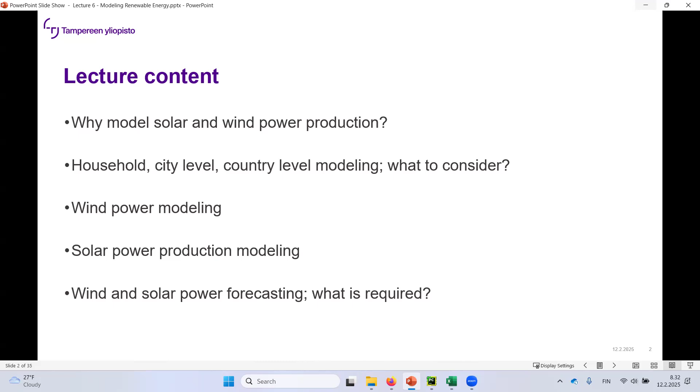Yeah, should be on. So the lecture will start on pondering again why the wind and solar power production are rather important. We'll briefly go through what are the things to consider when you're doing household, city level or country level modeling. Mostly this is about gathering data. You have to be able to gather solar irradiation data and wind speed and directional data. And then some techniques about wind power modeling and solar power production modeling. So what is required when you are doing these?

So again, the same picture that I've shown you before about the energy systems. There's the supply, storage, conversion, consumption, and the transmission. So this is part of the primary energy palette that you have the solar and wind, and at the moment on a larger scale, in a global scale, they are somewhat insignificant in terms of absolute amounts. But for example, in Finland and some other regions, they have a huge impact on the energy prices, for example.

So the conversion, it's already happening in the solar and wind power plants. So in that sense, it doesn't have this traditional conversion part. So straight to the electricity grid or to the consumption.

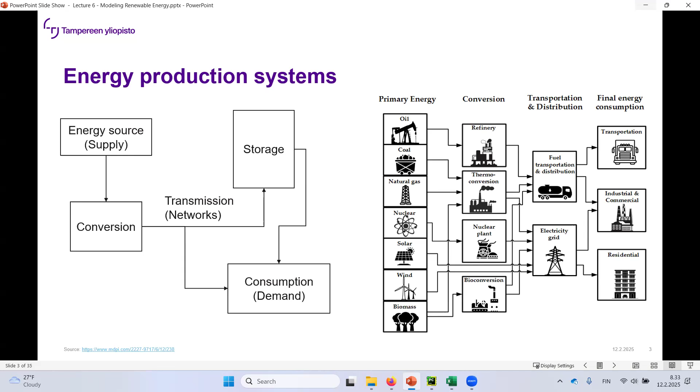And by the way, related to solar power, I think it was Albert Einstein that got the Nobel Prize on explaining this principle related to the solar power. So valokemiallinen ilmiö. I'm not sure what that was in English, but either way. So it's been known over 100 years. I think it was something like 1904 that he got the prize.

But yeah, I digress. So why do you want to model the solar and wind power production? It's essential for energy system planning nowadays. Grid stability, market optimization. You have to be able to know beforehand what's happening. So it's related to the site selection. So what site, for example, provides the best wind conditions, solar conditions, investment decisions, and predicting the renewable energy output related to this grid stability.

And this variability related to these production systems, it's in the center of this modeling. So you want to be able to know how fast the system power changes. As we talked about last time, it was about the storage optimization also. So you have to be able to know the production to be able to optimize the storage systems. So to enhance economic feasibility, and of course for policymakers, how fast can we implement these kinds of sources to go towards the net zero system?

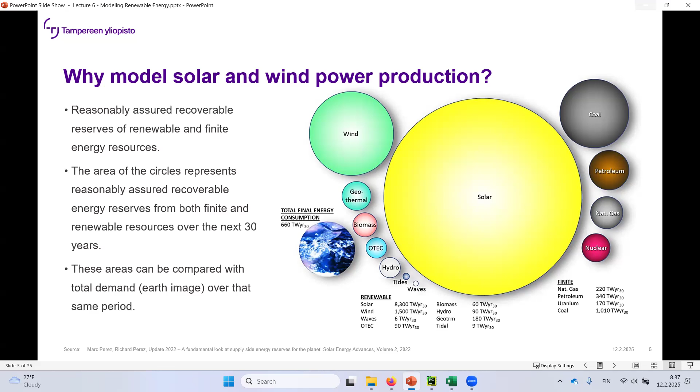But either way, if we can jumpstart the hydrogen economy and add the consumption of these cheaper energy sources, then it's going to do good for this wind and solar power development.

And I think the capacity in Finland at the moment was somewhere close to 9,000 megawatts. So at least it's over 8,500. And like 10 years back, nobody would have expected that. 10 years back, it was somewhere close to 1,500 or something like that. So it's almost 10 times, well, 5 times bigger at least.

So by the way, now you have the Moodle assignment 2, and there was the question that you have to modify. It was considering Finland as an island related to electricity production, so there are no connections to other countries. The assignment was that you have to add some capacity in there. And of course, you want to add solar and wind, but as you can see, in some cases that's not going to be enough. So that makes you wonder and ponder what is going to be the flexible, dispatchable power source for it.

It has been biomass, but nowadays they are using even nuclear power to down-regulate, especially when you have too much wind and solar in the system. By the way, don't increase water power too much in Finland. We don't have the capability or the rivers anymore for that.

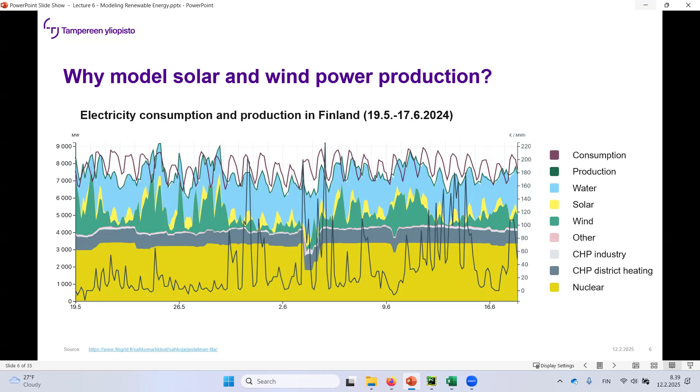So what to take into account when you're doing this household level modeling related to solar and energy? The focus is on individual solar panels and really small wind turbines. So you have to have a high spatial resolution. And usually when you're gathering solar irradiation data, you have to get as close to your household as possible, but there aren't too many measurement stations in Finland. Well, there are many, but they are most likely not close to your house. So you have to take some kind of an average, for example, from different sources if you want to make really exact modeling.

And it's usually a deterministic approach, based on hourly or even sub-hourly weather data and historical production from the installed system. So that's a good thing if, for example, your neighbor has a solar panel, then you can ask, hey, can I see your production data? If that's possible, then you can backtrack the irradiance data. And that's really essential when you're trying to determine the system profitability.

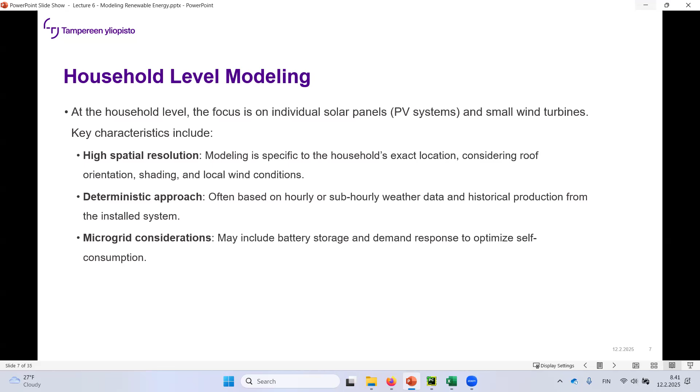So you have to have accurate data on consumption. You have to have accurate data on the weather conditions, whether it's the wind or the solar irradiation or whatever sources. The Copernicus data is the first you're going to go to, and there one grid cell is almost 30 kilometers, so it's averaged based on that. And then you're going to go to the Finnish Meteorological Institute site and see if there's any measurement data with higher resolution.

Limited aggregation effects. So variability is high, as production depends entirely on local conditions, and you have really small production systems. There are different kinds of commercial software that you can use to model these, and a lot of internet calculators to calculate the profitability of solar panels. But I would say that it's always better, if your neighbor has the panels, to get the irradiation data directly from there.

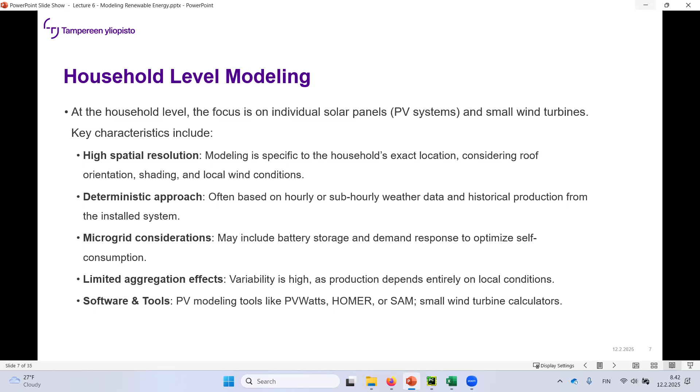So city level modeling involves multiple households and buildings. So there's the effect of aggregation: spatial aggregation of multiple photovoltaics and wind installations. In this case, for example, the Copernicus data sets come into play. So you can take the averaged wind patterns or irradiation data. And then you have to take into account grid-related issues. So how much electricity can you transfer in the network?

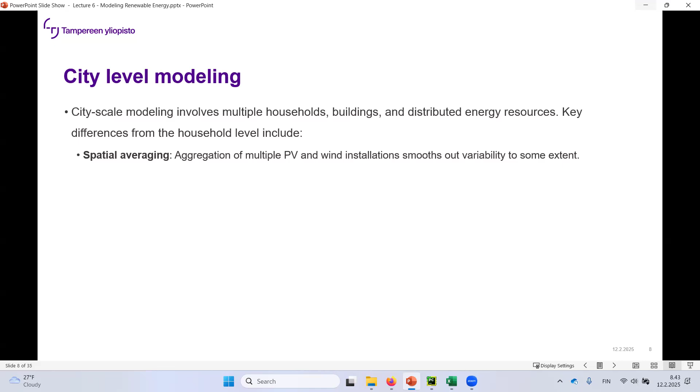That's actually one issue related to one of the master's theses I'm supervising: a certain city wants to inspect, if there's going to be a lot more wind power in their area, does it fit into the transmission grid? So higher grid interactions. You have to be able to see how the production interacts with the grid, and if there are some bottlenecks in the transfer.

Weather variability across locations. So you have to apply more complex weather models to make the predictions, but in terms of weather data aggregation, if you aggregate the weather data, it seems that it smooths out the profiles. So if you have gusts of wind here and there, it usually means that in another place it's more stable. So they are averaging out the really sudden spikes in production that are evident at the household level.

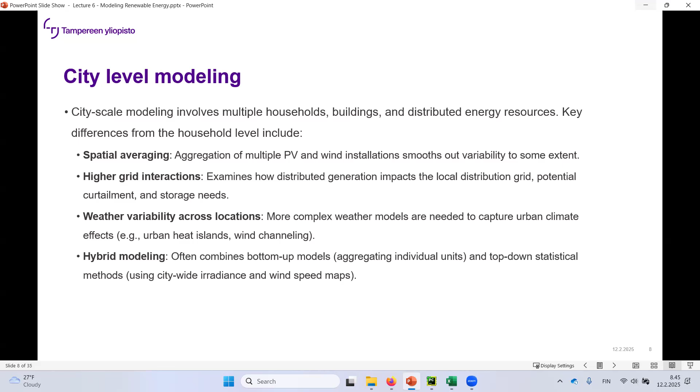So then you can start to combine these bottom-up models and top-down statistical methods. And then you have to have these GIS-based tools, so you have to have some kind of location data in there. And country-level modeling, so that's what you are doing with SpineOpt, and we are doing it at a really rudimentary, crude level.

And what you're using in there is previous year's data. So what is the capacity factor? The overall capacity factor of a country comes into play here. Since Finland is one price area, it's easy to use the previous data from Finland, the whole Finland's production. If it were split into multiple price areas, price zones, it would be a bit more difficult. But in this sense, Finland is a rather easy country to model since it's only one price area.

So for large resource mappings, you can use satellite and meteorological data for forecasting, grid integration studies, balancing variability with demand, transmission constraints, storage options. So there seems to be some kind of a bottleneck forming in the north-south direction in Finland related to the grid that Fingrid is already aware of, and it's taking precautions related to that.

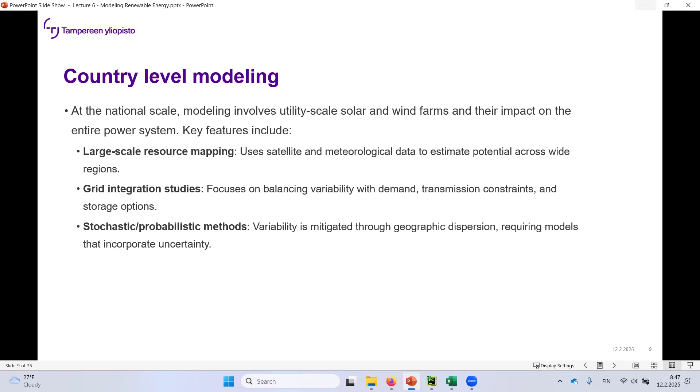So they are in net demand, and Pohjanmaa, since there's a lot of excess wind power production, would have to be able to transfer the electricity from there to Helsinki. So that's forming some sort of a bottleneck. But they are still not talking about making multiple price zones in Finland. So stochastic and probability models, that's what you're using in here. And the temporal resolution, as in your case in the SpineOpt exercise, is going to be hourly, but you can range to multi-year simulation as well.

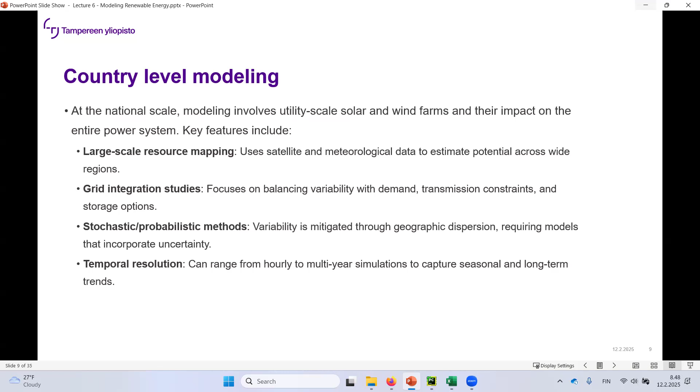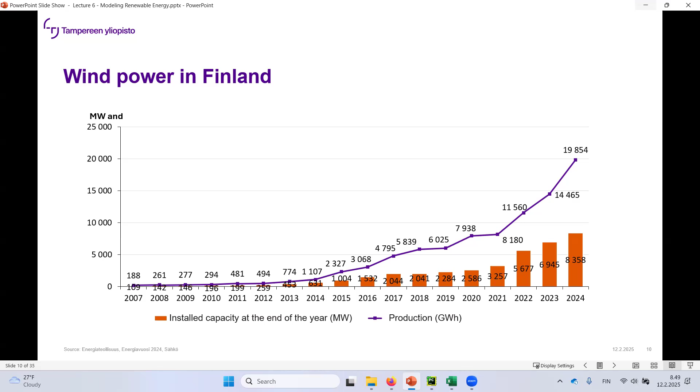And then there's the market and policy considerations. So at the end of year 2024, it was 8,358, so I guess around 8,500. You can see there's a really steep trend upwards, but it is showing signs of saturation. So there has to be some kind of consumption for this in Finland that's going to arise. Most likely it's going to be related to hydrogen production, for example.

So there is variability in wind production. I think this was from Fingrid and Renewables Ninja, or probably only Renewables Ninja, because they offer more accurate resolution than just the entire country. So you can select a certain point in Finland, or you can select the entire country, and there you can see the capacity factor, so the power production index relative to the maximum, how much is being produced.

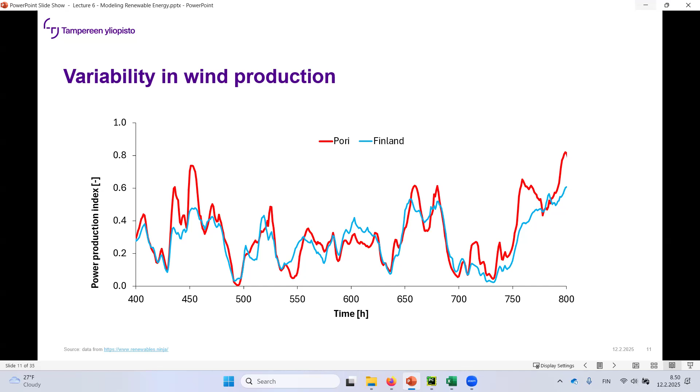So you can see that in the Pori region, there are a bit steeper changes, but there's not too much difference here. Since Finland has concentrated almost all of its wind power production on the western coastline, the entire country is rather close to what's happening in, for example, Pori. So the load duration curves are almost equal.

But then if you go to Germany, this is from Tom Brown's course on energy system modeling. I've linked the lecture slides in here, and you can find the course completely online. So that's a really excellent course.

So you want to check that out as well. So there's Berlin wind, Germany onshore wind, and Europe all wind. So you can start to see the effect of the aggregation in here. So the best thing, of course, would be that the renewables would kind of follow the load.

But in essence, this is a good thing, that the wider the area, the more flat your load duration curve is going to be, because it means that it's going to be steady production. So you can see in Europe, there are no 0 hours. And in Finland, I'm guessing there are a few that have just a really small amount of wind power in the electric network. But either way, we are also not facing too many 0 hours related to this wind production.

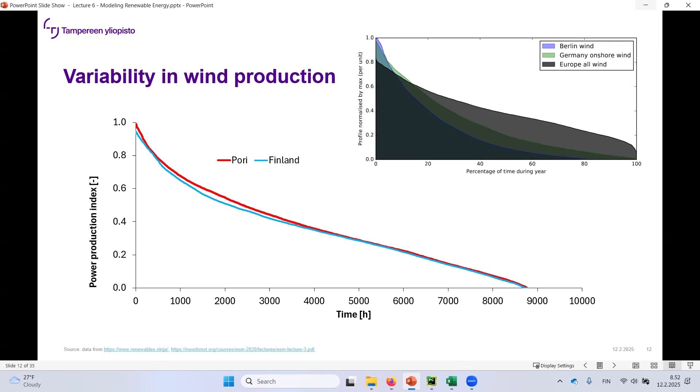About the Copernicus wind data. You can go and download it freely. You just have to register on the site. So there's a lot of wind data available for most regions. I don't know what's the coverage, I didn't check it, but for example, for Finland it covers pretty much all of Finland, including land and ocean areas.

High temporal resolution, so they provide hourly, 3-hourly, daily, or monthly time series. So this hourly is really nice. Of course, the Finnish Meteorological Institute provides, I'm guessing, maybe 10 minutes, so it's sub-hourly production as well.

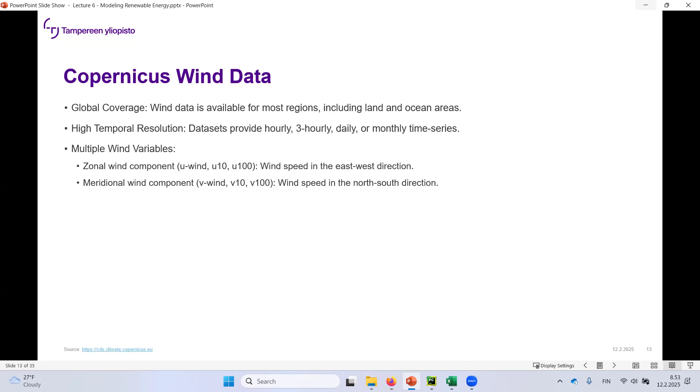There are multiple variables in this Copernicus data. So there's, for example, this wind component. It's like the north-south, east-west component. So when you have both of those components, then you can also calculate the direction of the wind. So that's a really nice system. So you can get the total wind speed from here.

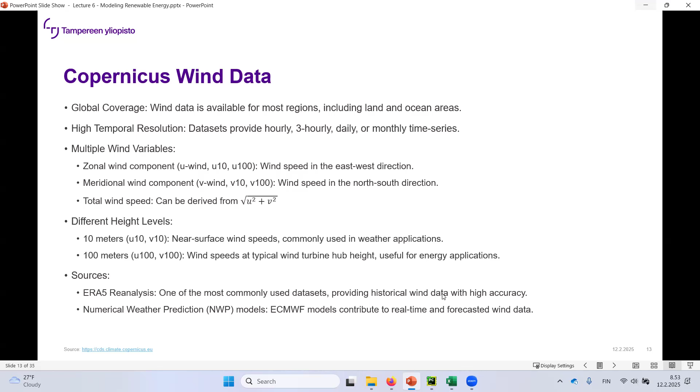Different height levels, 10 meters, 100 meters, for example, are usually provided. And that is something that you can utilize with typical wind turbines, because that's pretty close to the height of the nacelle. And this ERA5 is something that you want to look for. It is in a somewhat tricky format, but now in the era of AI, I wouldn't say that's a problem.

So let's go here. Okay, let's see. Copernicus ERA5, so hourly data. And from here you can make downloads, and you can see that for wind, you could, for example, take the 100-meter U component and V component. So you need both of those to get the direction and the mean wind speed.

And for radiation, you can see there's surface thermal radiation downwards. That would be something that you want. And you can select from all the years, so there's a lot of data. You can select, for example, which month, so this would be January. And then you can select all the dates and all the times.

And then in here, if I recall right, Finland would have been 70, 59 in here, 32, and this was probably 19, according to AI at least. So then I would use this one, but I would have to log in here, some login problems now. But then you submit the request, this API request, and it takes maybe 10 minutes, and then you can download it.

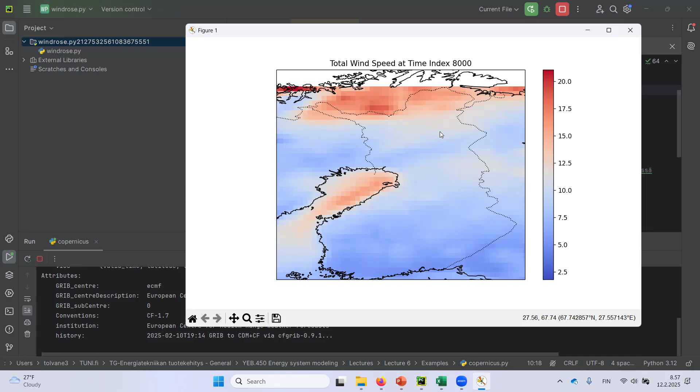So that's from Finland, and you can see that the wind speed, for example, in the northern areas at that point was rather high, and in the sea areas as well. So there's a lot of data freely available. You just have to know how to utilize it.

And what I did manage to do with the data, I asked AI to make me a program that extracted, because the grids in the Tampere region, I think it was 28 kilometers times 13 kilometers. And I'm thinking that the further north you go, the narrower the grid gets. So that's why it doesn't have a 28 times 28 resolution.

So what I did is I took the wind data from all of these points. There were 25 points, so I have 25 different wind speed time series. And then you can calculate the wind production; this is from 100 meters, so it means that the nacelle is at 100 meters. And then I gave all the wind power plants a diameter of 150 meters and an efficiency of 0.4. And that's the basic equation to calculate the power.

So there's the minimum and maximum powers in this area. If everything was concentrated into one point, that would mean that there would be really large variations. Wind speed varies quite a lot, in the sense that in this area you can have like 2 meters per second lower wind speed in one region than the other, and that means there's going to be a lot of power variation. But if you aggregate it, it makes the power variation much lower.

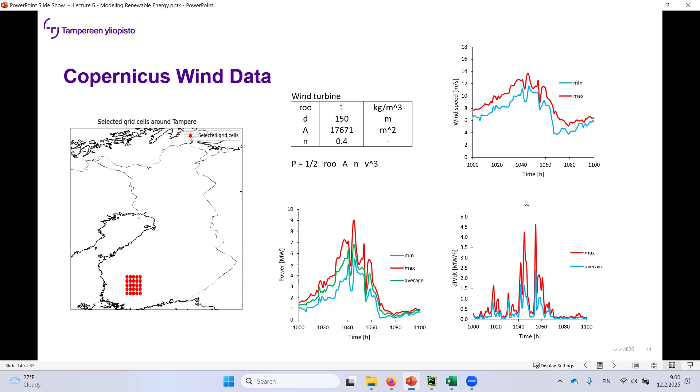So that's the derivative of the power in megawatts per hour. If I average out the data from this power production, there's only 1.5 megawatts per hour changes. But if I don't average it out, there is a lot more variability. And that's a good thing for the system, because it averages out the production. So whenever you want to make accurate wind power production modeling, you have to cover the overall area that you want. And this Copernicus data is really suitable for that. We'll probably try to utilize that in the exercises as well.

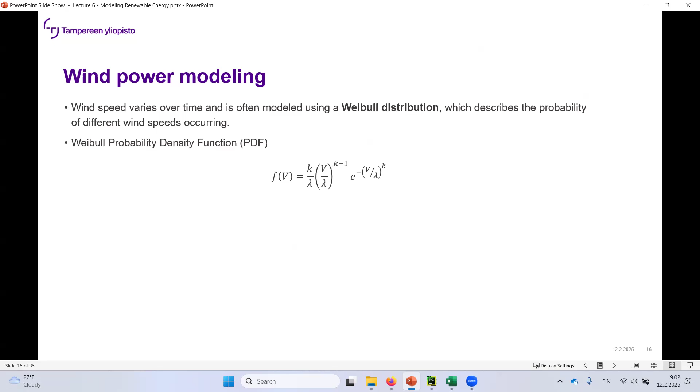Then, of course, you have the Weibull distribution, which shows you what kind of probability density function your wind speeds have. If you have wind speed data, you generate this Weibull distribution, and then if you want to calculate next year or next day, you can use it for the forecast. So there's the wind speed, the shape parameter and the scale parameter. And what it looks like is something like this.

And I went ahead and downloaded wind speed data from Siilinkari, in Tampere. You can see Siilinkari from Näsinneula, for example. It's rather close to the shore. So in here, there's the time, again UTC if possible. By the way, in your SpineOpt work, Justinas Jasiūnas gave you another time zone that you have to utilize, so be mindful of that.

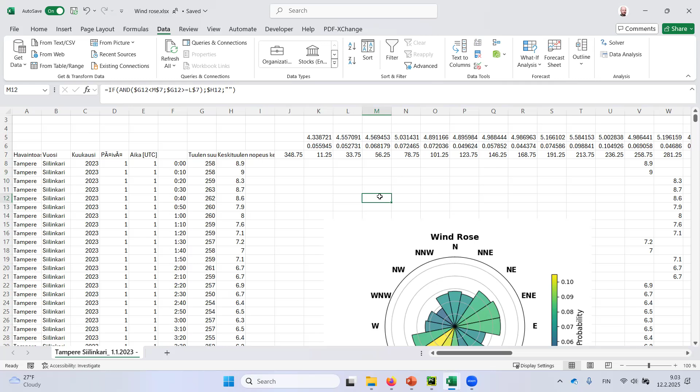So there's the keskituulen nopeus, so average wind speed, and then there's also the direction. The direction can be used to plot wind roses. And by the way, there isn't any sensible way of making wind roses in Excel. I tried and I failed. So utilize Python for that. That's much easier, especially with the help of AI.

But what we did with the probability density function before, we utilized it for, I think, power production or power consumption. So you have that tool in your toolbox. So what I can do is distribute the wind into different boxes based on the lower level and upper level.

And then you get the probability of wind, how probable it is that the wind blows between 5 and 6 meters. So then you get the probability density function points, and then there's the Weibull distribution. You can utilize either Excel's Weibull distribution, or you can utilize the equation that I just showed. Both give you the same answer.

And then there's the least square error fitting method utilized in here. So I'm taking this point minus this point to the power of 2 and calculating the sum of it. So with this solver, I can say that the K parameter is 2.88 and lambda is here. So if I change this lambda, for example, to 3, you can see that it starts narrowing down the distribution. So that gives you how kind of a

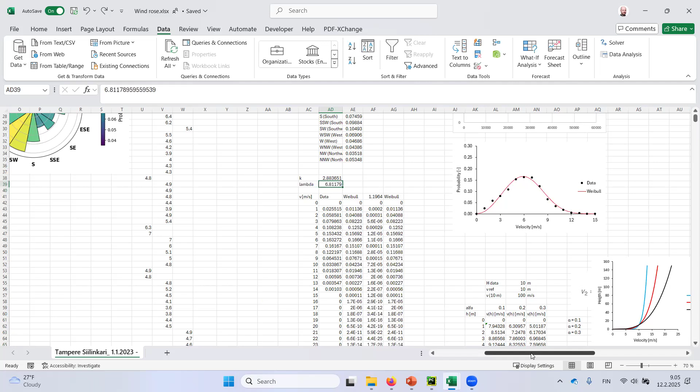narrow, sorry, I was supposed to change this one. Yeah. That was the mean wind speed. Yeah, no, I think it was this one. So these both affect how narrow the distribution is.

And you can kind of backtrack or backwards calculate based on the distribution that you have. If you have a certain time span, then you have the original wind speed. Then you give some random probability, and based on that, you can calculate with the Weibull distribution what is going to be your wind speed at a certain moment. So that is a good tool for making this kind of probability-based forecasts.

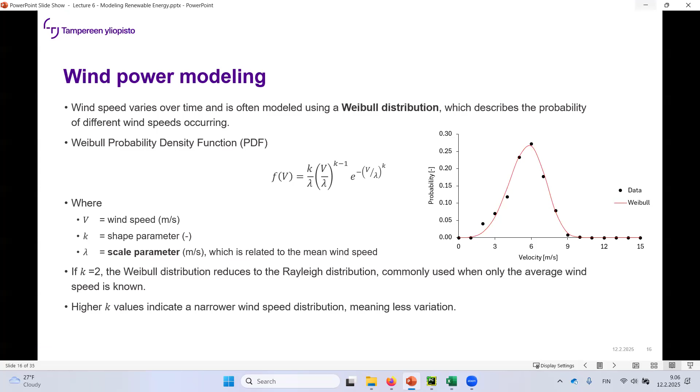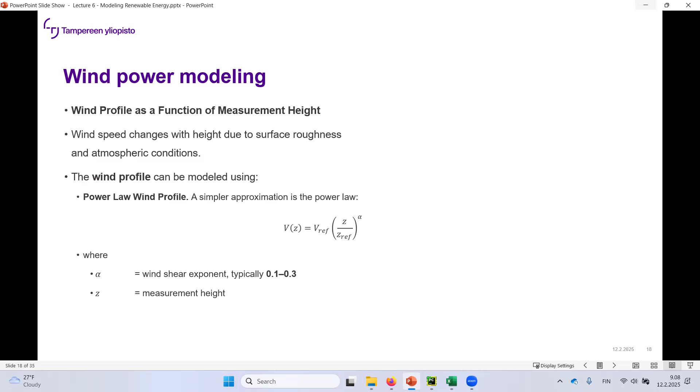So one thing, if you are making this wind power modeling and you only have wind speed at really low altitudes, for example, 10 meters, there's a way of making the scaling. So you have this kind of a simple exponential scaling equation that you can utilize that is somewhat accurate to some extent. There's this wind shear exponent that you have to determine based on what kind of terrain type you have. You have smooth surfaces, for example, water surfaces, if it's open country, if it's forest.

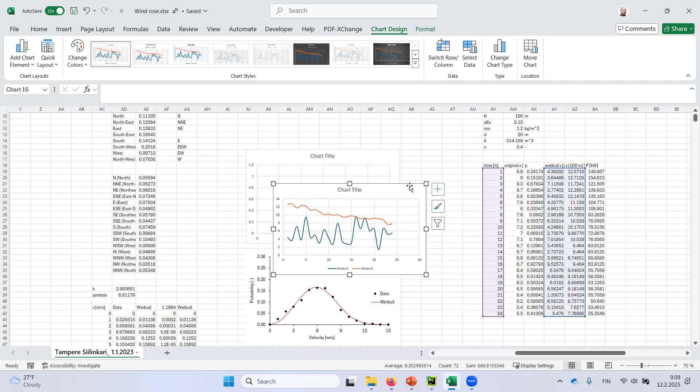So that is a good tool if you only have limited data from that area. So this is really good for those kinds of household level and maybe city level modeling. So it's just about scaling up the wind in here. So if I were to draw these ones, I have the Weibull based and then there's the higher altitude model. I think there was something wrong in that now because it didn't seem right, but this is the basic concept.

So they are really useful when you're doing this wind power modeling, especially when you are taking into account these wake effects. So that is an essential tool. And for example, you can also make this kind of data based on the Finnish Meteorological Institute.

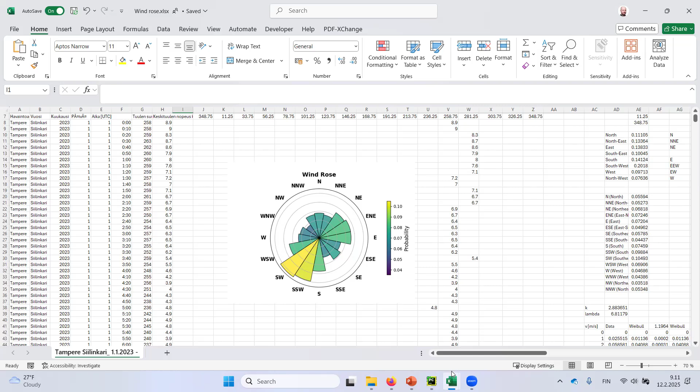So again, for example, you might want to use Python for this wind rose. It's rather easy to get this kind of a plot based on the probabilities. So either you give the wind data and ask it to calculate it based on that, or just directly give the probability numbers for these ones.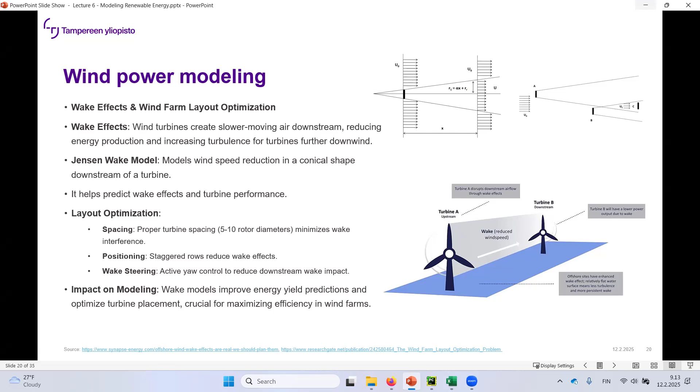And this is really kind of essential nowadays, because you can see in here, that's 5 kilometers. This is in Lestijärvi. So there's maybe 500 meters, 1/10 of that, not sure. It may be even closer. So those wind turbines are really close together.

And the other side of the coin of this equation would be, how much cable do you need? So you need to be able to distribute the wind turbines in a way that, based on the wind rose, the direction, and also the wind speed, it would provide the optimal production. Of course, you could scatter them all around and you wouldn't have any wake effects whatsoever. But then you would have a lot of cable that you have to draw. So that's the optimization problem.

That's Lestijärvi, Central Ostrobothnia, Pohjanmaa. So this is going to be a total capacity of close to, I think it's a bit higher than that. There were more turbines in some sources, so close to 500 megawatts either way. So what you could do now, when you have the Copernicus data and the coordinates of these systems, then together with AI, utilize the wind rose that you can get based on the Copernicus data, and start seeing if this actually is an optimal configuration for this wind farm.

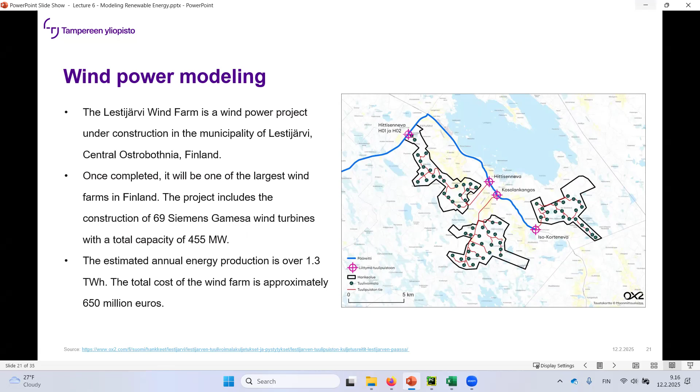650 million euros. And if it produces 1.3 terawatt hours of electricity, that's something that you could calculate, and you could see that if I move this wind turbine from here to here, we could have gotten this many million euros more. So this kind of wind farm layout optimization is essential related to these.

So, solar power generation in Finland. Fingrid gives you this total solar power capacity, but that's an estimate because they're not all connected to the grid in power plants. It's scattered all over, so they have to estimate it. They estimated the installed capacity by using installation statistics published annually by the Finnish Energy Authority, Energiavirasto, that it receives from the distribution system operators. So it's somewhat vague, but seems to be rather accurate.

So what's happened from 2020 to 2025, the installed capacity has, is it quintupled? So it's over 5 times what it used to be. And it starts to show in the production. And that's the yearly production.

So during summer, it's high, but in the winter, it's near zero. But in a sense, that's a rather good complement for the wind power production, since usually during the winter times, the wind power is at its highest. At least one of the reasons is because the air is more dense.

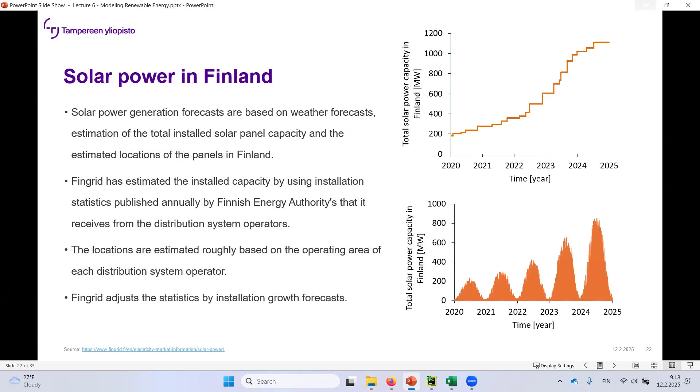But yeah, there's a really upwards growing trend, and the power plants are getting rather large. So this is just only a part of this Kalanti. So let's see that from the map.

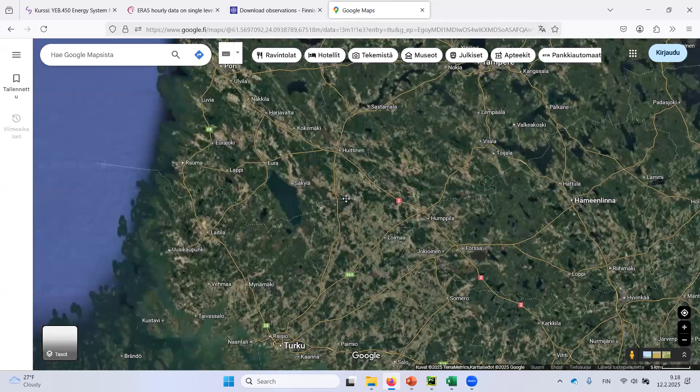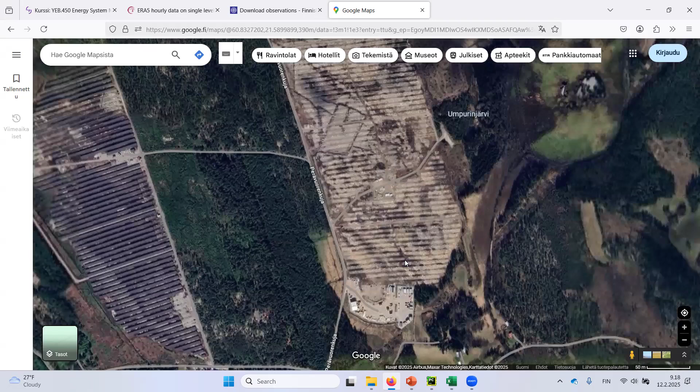You can see that there isn't everything installed in there, but I'm going to take Google Maps out and let's go to Kalanti. This is really nice when you can use these short excursions. So I think it was Uusikaupunki, Kalanti, and you can see it from here. So there's one site, there's going to be another, and you can see there's construction happening in here. And I'm guessing they are utilizing also some areas from here and here.

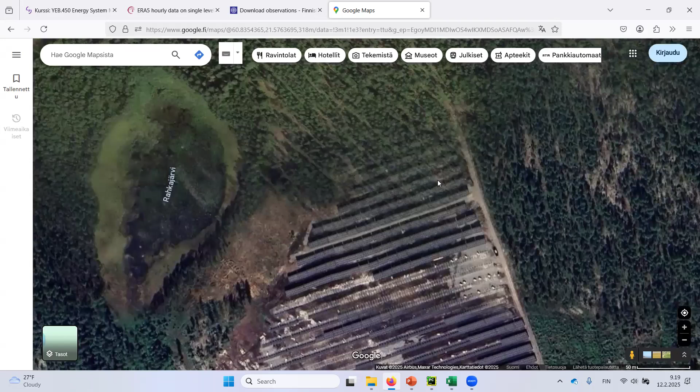And you can see that Google Maps starts to kind of parse these satellite images together. Or I don't know if it's satellite, but either way. So this is going to be some 200 megawatt peak. So it means the peak power that the panels are rated for. So maximum 200 megawatts. Once operational, it's expected to be the largest solar power plant in Finland.

And 380,000 high capacity bifacial solar modules. So bifacial meaning that it can also produce electricity from the other side. So since there's reflection, it takes even less space. It's even more efficient. Or not more efficient, but it's more efficient in kind of utilizing the irradiation.

So annual energy production exceeds 200 gigawatt hours. So from here you can see 200 megawatts and 200 gigawatt hours. So there you can calculate the capacity factor. So it's 10 or 12% maybe.

So that's what's going on with the building projects. A lot of those larger scale solar farms have been built. And for example, in Lempäälä, we saw that there was this battery energy storage right next to it, to balance out the power production.

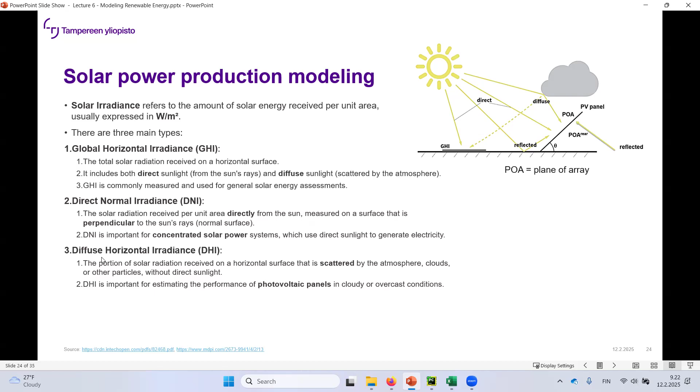And diffuse horizontal irradiance, so that's something that's scattered from the clouds, for example. And then there's also the reflected radiation, so the albedo of the ground affects this one as well. And then if you have, for example, this global horizontal irradiance and this diffuse horizontal irradiance, you can calculate the DNI, so direct normal irradiance. So this is a lot of trigonometry, as I said.

So how do you measure these? This is something that my knowledge is really limited on, but this pyranometer. So there's this measurement device that you can use to measure the GHI or DHI, so the global horizontal irradiation or the diffuse radiation. So you can make a shadow on top of it. So that's the diffuse radiation and this GHI. And then there's the direct normal irradiance, where you can track the solar position, and whatever comes to it, that's normal to it.

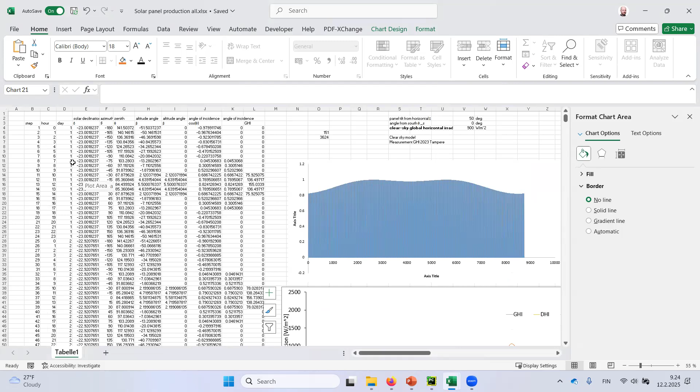And what I did in Excel, then I made a kind of exercise on how to calculate these. So there are multiple sources where you can see how to calculate, for example, solar declination. It's related to the fact that the globe is tilted. So if my head is the sun and the globe starts spinning around it, if it's sideways like this, it's a different angle than in here. So the solar declination affects it.

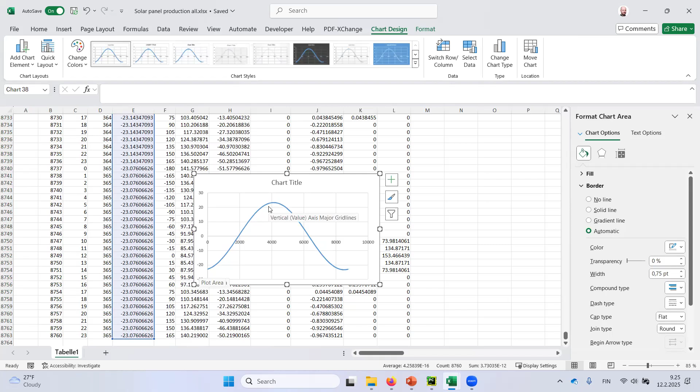So you can calculate the solar declination, and what it should give you is something like this. So was it 23 point something degrees tilted? So based on what day of the year it is, the solar declination changes. Then your azimuth. This isn't really the exact way of calculating it, but it's rather close. So what it means is that the day changes in here. So the sun goes from there to there, and again from there to there. So it makes this kind of a zigzag line.

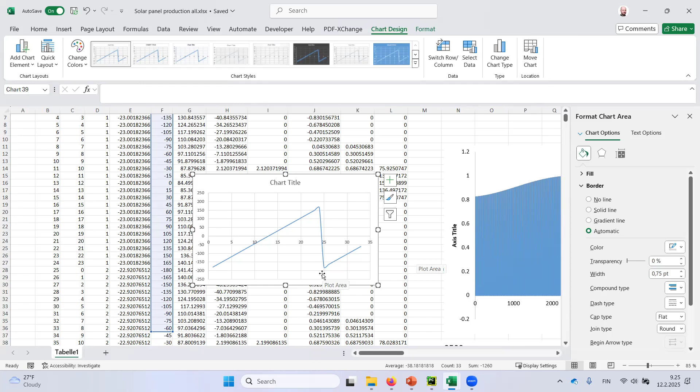And then you can calculate the zenith. So how far away are you from being horizontal. So in the winter time, you are much further away from horizontal level. And if we were to zoom in on here, so let's put, for example, 100 in here, you can see that there's seasonal variation and daily variation.

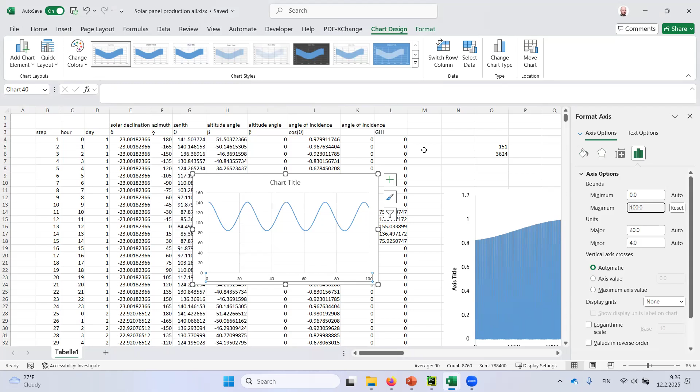But this is pretty much all trigonometry. And Python, for example, offers you these libraries, these submodules that you can calculate these freely. So you don't have to necessarily do this. So the altitude angle is what matters. You want the altitude angle, and then you want the azimuth. So how it follows the east-west motion.

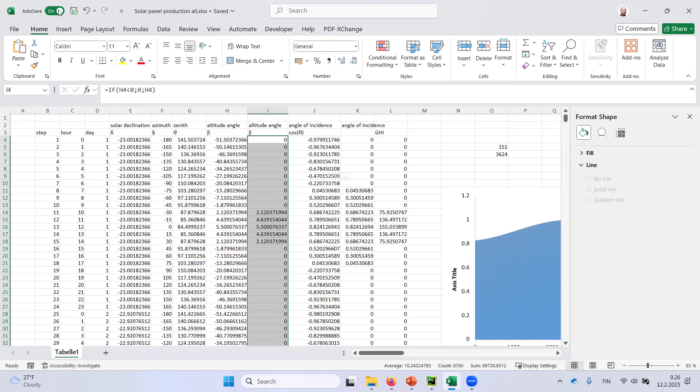And in here, if I put the altitude angle in Tampere region, it's something like this. So the sun starts climbing up from the horizon more and more. So whenever you're doing this really localized, not country level, but household level, or even city level, area level modeling prediction, this is what you have to utilize.

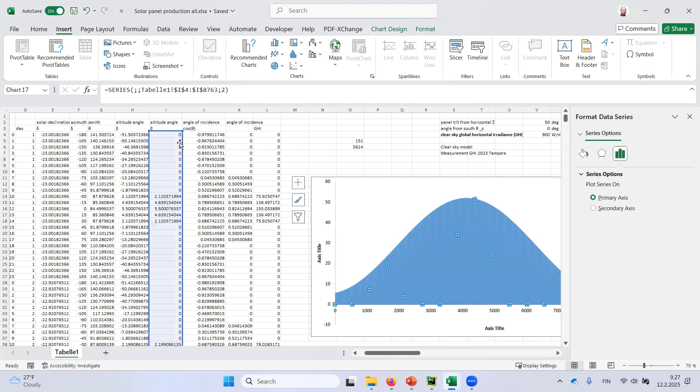And what you get based on that is the angle of incidence and the cosine of it. So that means how much of the radiation is directly coming into the system. So if I increase the tilt, you start seeing that a bigger and bigger proportion of the radiation starts hitting the solar panel.

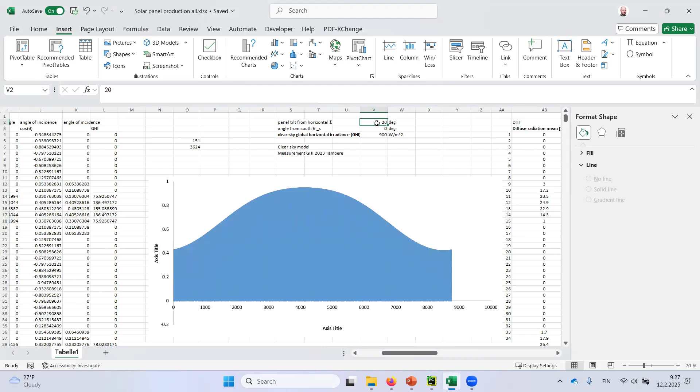But then you can do an overkill. You can go to 60, and you notice that during the summertime, it starts climbing even higher than it should. I guess in Finland, it was somewhere close to 50 in Tampere region where the maximum production occurs. So that's why you want to tilt those panels in that way.

For this solar power production modeling, you can utilize either measured data, which is always, I think, better, because that offers you a way of avoiding making these cloud models, or utilizing this clear sky model. The clear sky model is maybe good for your understanding. What it shows you is the amount of radiation that would come onto a horizontal surface. So it only depends on the solar zenith angle, so how far from the horizon the system is.

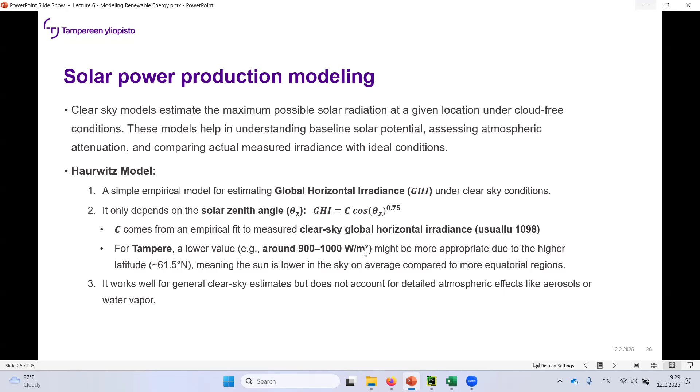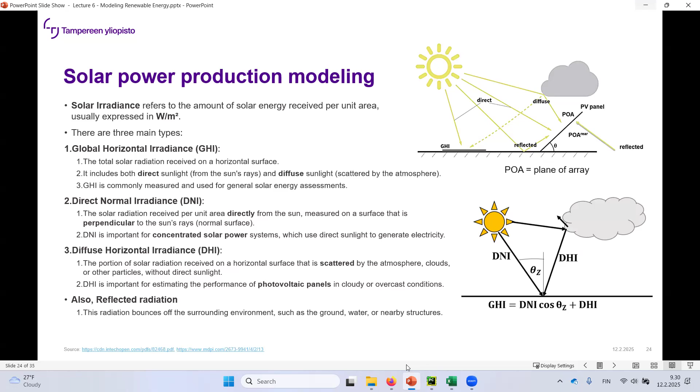So in here before, I gave you this equation. So when I was looking at the measurements from Ilmatieteen laitos, the Meteorological Institute, you can see that you have radiation observations: diffuse, direct solar radiation and global radiation. These would be the three that you need for the production modeling. But a lot of the data doesn't include the direct solar radiation. So that's why I had to calculate it.

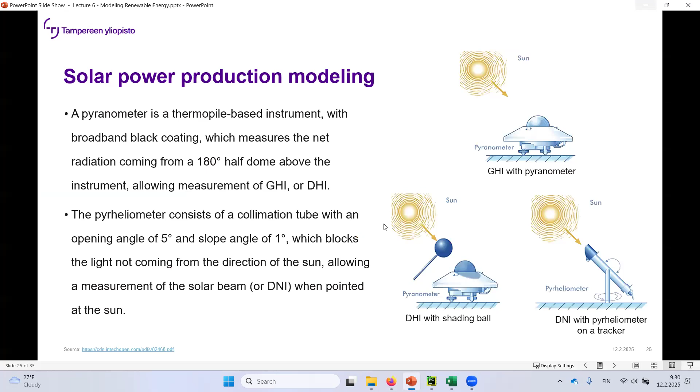But yeah, those are the values that you can utilize in this local scale modeling. When you are going into larger scale models, then you might only use these GHI measurements, so global horizontal irradiance, and they are provided by Copernicus again. So in Finland, I think it was somewhere around 28 kilometers times 13 kilometers. So that averages out rather well the effects of this cloud shading.

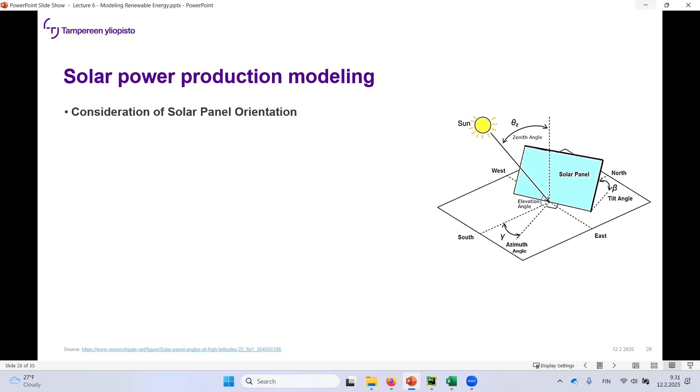So tilt and azimuth angles. If that's facing south, how do you want to face the panel? And if that's the horizon, how do you want to face the panel in this way? That's the optimization problem. Usually when you're making household level systems, they are installed on the roof, so it's a fixed system. But if you can optimize these angles, it can increase the output by a lot. Usually 0 azimuth angle, so it's directly facing south.

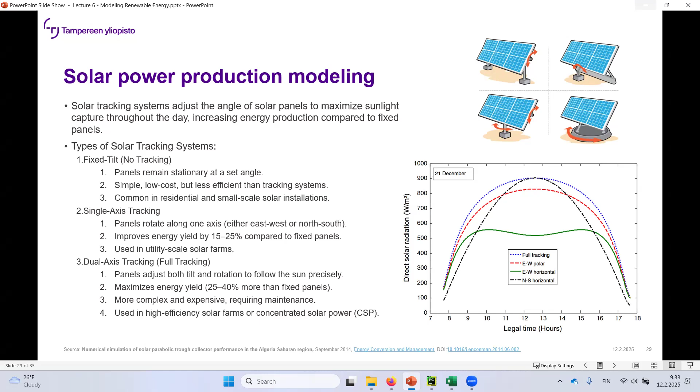So there is really a difference, but you want to optimize the costs, of course. For example, this dual axis tracking, you could utilize it in concentrated solar power. That's really essential when you're using these mirror systems, so it's more complex and expensive. This single axis tracking could be utilized well in utility scale solar farms. Even 25% better in some cases, based on what the variation is in the azimuth, or rather the elevation angle.

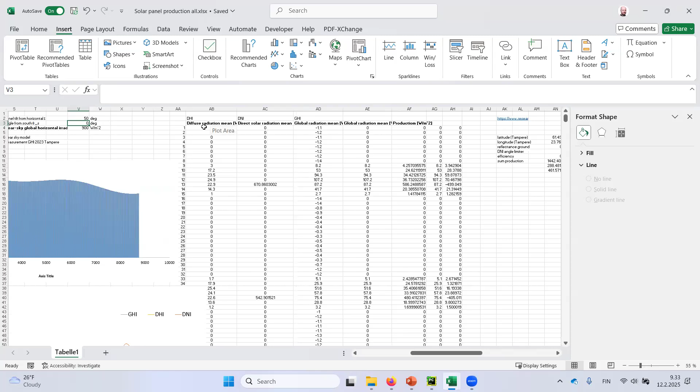So for solar power production modeling, what I did again with this data that I got, I think this wasn't from Siilinkari, but it's from Middle Finland either way. What it provided was diffuse radiation mean and global radiation mean. And I filtered out the negative values from there, and then I calculated the direct solar radiation based on these two. So this is measured values, filtered measured values, and then you calculate it.

And I had an angle limiter. So it meant that if the sun is really close to the horizon, I'm not going to calculate the direct solar radiation, because then it would have been, in some cases, really high because of the inaccuracy due to the angle.

So from there, you can calculate the overall production. You have latitude and longitude, you have reflectance from the ground. And it seemed that this doesn't affect the production too much as I calculated it. So we can put it to 0, and you can see the sum of the production, rather low effect. So 0.2, some effect. So that's the total irradiation that comes in kilowatt hours per square meter. And then when I multiply it with the efficiency, it would produce that much.

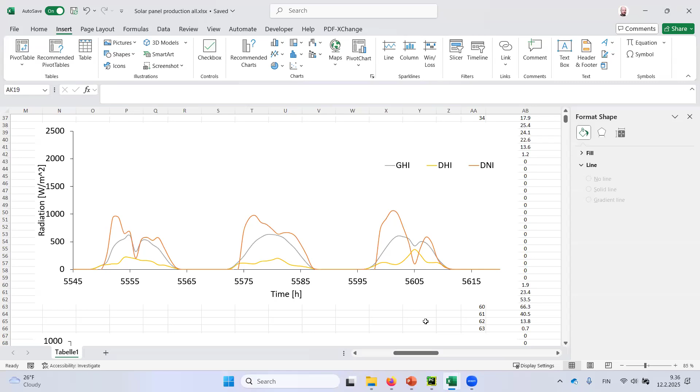So this is from this measurement data. And what the measurement data does, it gives you all the variation. So if you have the variation in this production, then you can calculate the irradiance. There's cloud cover, so you can calculate the production rather easily. I also went ahead and checked whether it matches the Copernicus data. So this is the Copernicus data, this is the GHI. This is for May.

And notice that with Finnish Meteorological Institute data, it's only from a single point, and this Copernicus data is from a wider area. So I'm not sure how they conjure those up, if it's radar or satellite imaging, or how they piece it together.

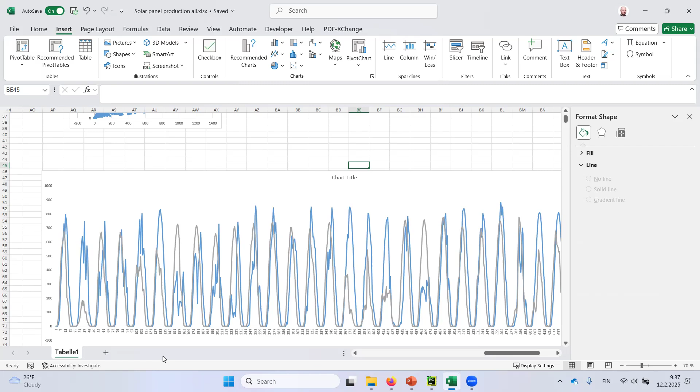But there seem to be some differences, and for a localized system I would use the Meteorological Institute, but of course for the larger scale system you are going to use the Copernicus data. But I think Copernicus only offered this global horizontal irradiance. I'm not too familiar with that, so it might be a bit more vague estimation.

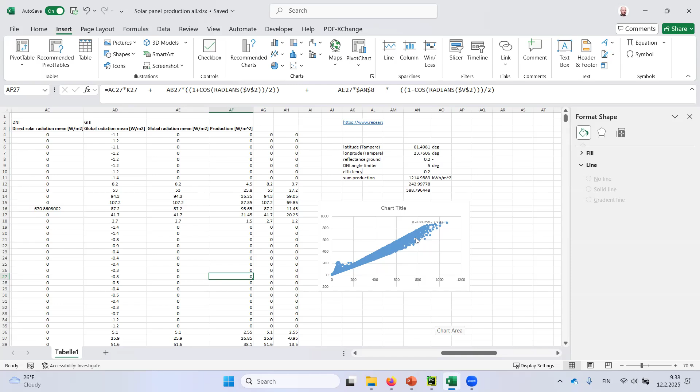So is there a correlation between the production and GHI? Because the GHI is usually what's being given to you. If I put this one to 0, you see that the correlation is rather strong. So GHI, what can be measured: if you just put the panel flat on the ground, it has a really nice correlation to the production of the system.

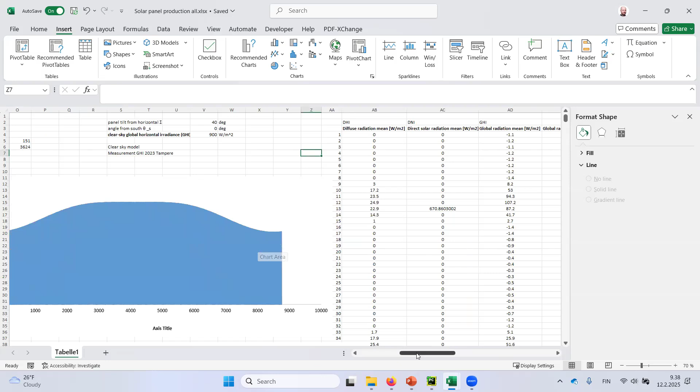But then when you start tilting it, the geometry comes into play, and you get more light from the horizon when the sun rises. So then it's not as clear a correlation anymore. I think that was an interesting phenomenon here. So if you only have this GHI, you can somewhat utilize it to calculate the production, but it's not going to be accurate.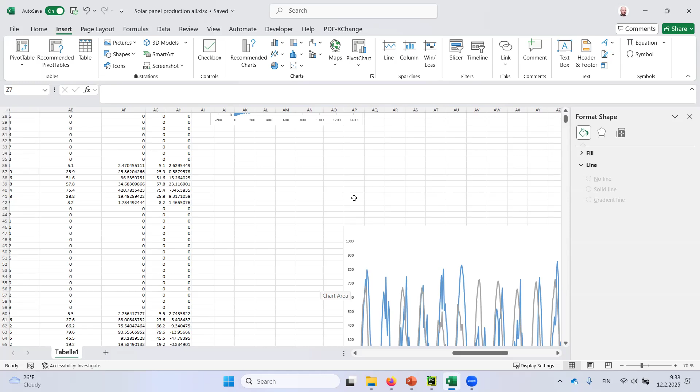So what other things can you utilize? Large-scale solar systems with aggregated production. You want to do spatial averaging, so averaging irradiance data over the entire array to smooth out local variation. GHI and DHI give a more stable estimate of the total power output.

Then power curve modeling. So based on historical data, if you can get the data from your neighbor, what's the power production? Then you can backwards calculate what's the solar irradiance and utilize that on your own panels.

And then load matching. These larger solar arrays aim to match power generation with local demand, so you have to have battery energy storage in there. But that's something we talked about last time, and you hopefully now have some idea how to calculate the power of the storage systems as well.

An interesting thing is, of course, how wind and solar power forecasting are made. Fingrid maintains a comprehensive database containing the coordinates and capacities of all wind farms in Finland. This information can be utilized in conjunction with the weather data. You can retrieve localized weather forecasts specific to each wind farm's location, and these are pretty much the tools I showed you to calculate the overall power. You have to have some information on the wind farm, for example, the average nacelle height and so forth.

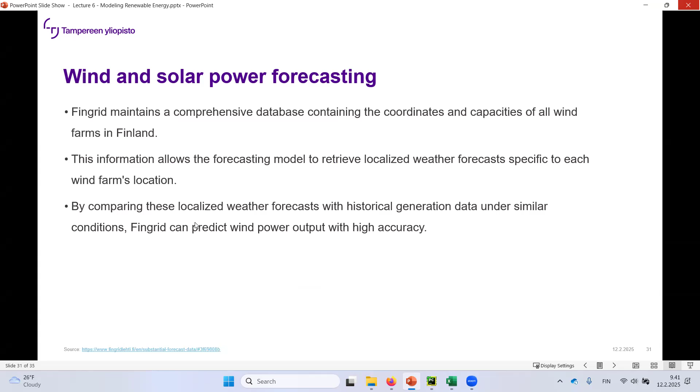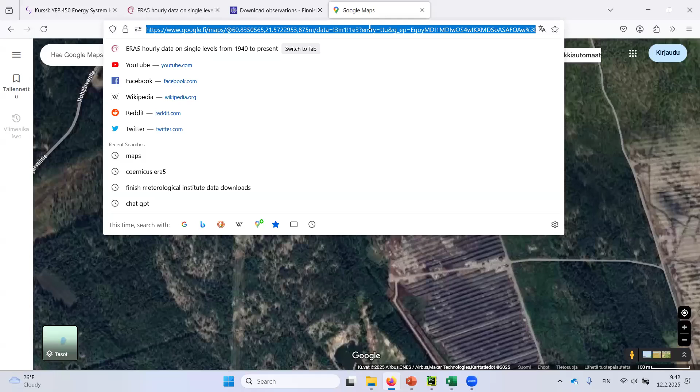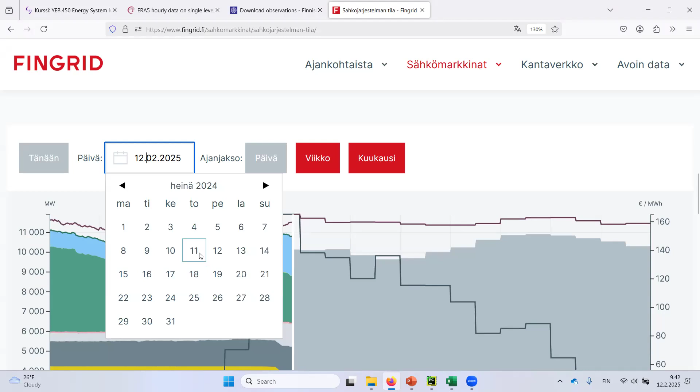Fingrid also forecasts solar power, again based on weather forecasts and estimates of installed photovoltaic capacity, derived from annual statistics provided by the Finnish Energy Authority. I'm not entirely sure, but I think it shows, if we go to järjestelmän tila, the state of the power system, and go to heinäkuu. I'm guessing that's a bad date. Let's take another.

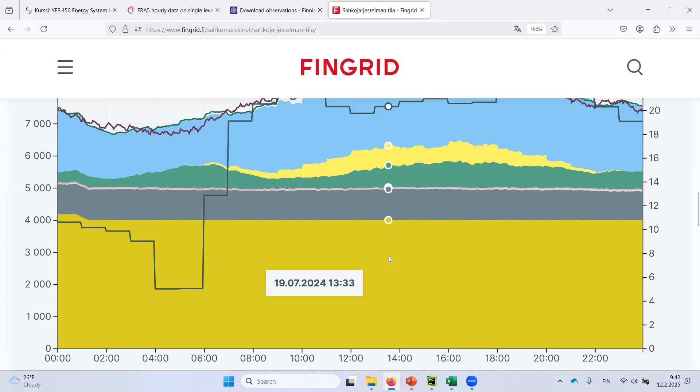Yeah, here you can see it. There are these step changes. Let's eliminate everything else than solar power. That I think is because of the estimates. So you can see there are these step changes. This isn't anything you are directly measuring, but rather an estimation even for this production curve. So it's rather hard to know how much we are producing.

So local information is approximated based on the data that you get from the distribution grid operators, and that becomes the real-time forecast. And in the solar forecast, especially, the production amount is rather low compared to the total capacity here on the upper part, the yellow curve. It's rather close, at least with this resolution. So solar forecasting, I think, is a bit straightforward, at least a day ahead, compared to wind.

Since wind power is directly proportional to the third power of the wind speed, even a small fluctuation makes a huge change in the power curves. So for wind power forecasting, you use this database of wind farms, so all the locations. You use the weather forecasts. You use historical data, so the model compares forecast weather conditions with past production data to refine these predictions, and then real-time updates. If you have measured wind generation closer to the point of this forecast, then you utilize those to improve the accuracy.

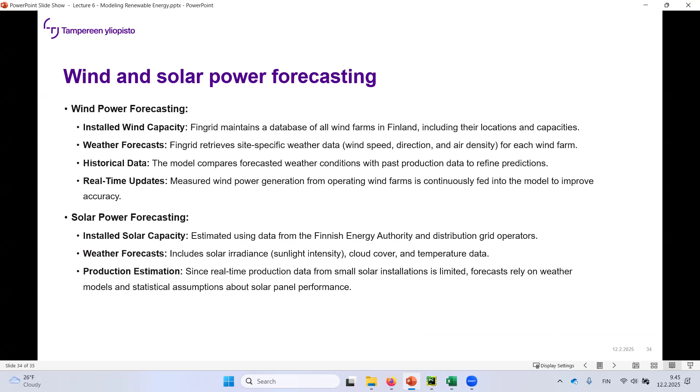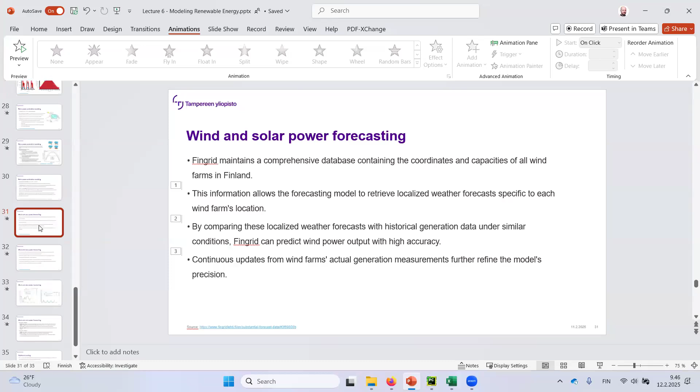And then I put some additional reading for you in here. So let's see if I can open these ones. I had one spelling error in here. Does anybody remember where it was? It would be nice to correct it. Usually here. So let's take, I'm not sure if it opened that, but it should be found really easily on Google.

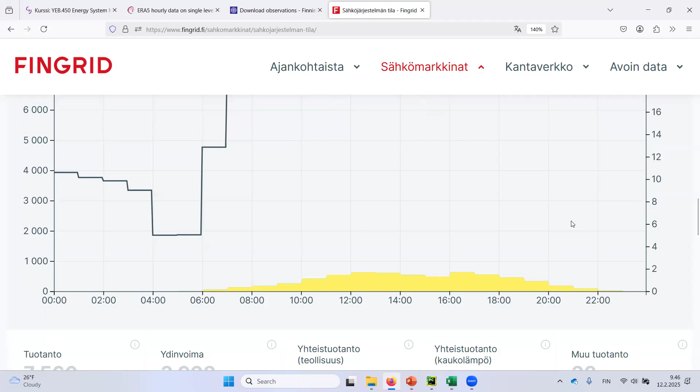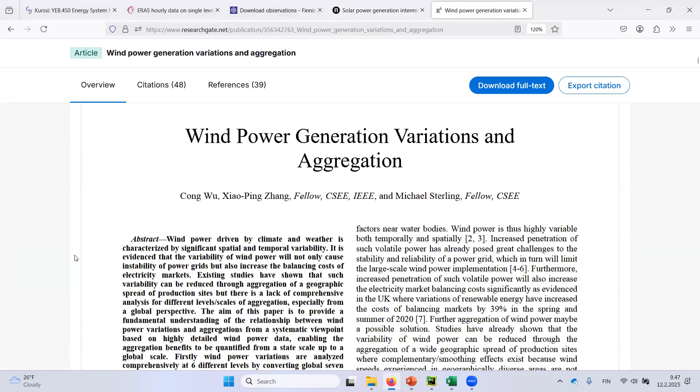Yeah. Solar power generation, intermittency, and aggregation. You can see from the curves here, they're talking about averaging out over large land areas. And the same goes for wind power generation and aggregation. Let's see if it opens from here. So from here, you can see how much the aggregation takes effect. There are the load duration curves of certain areas, and there's the global wind production, and as you can see, it's rather flat. So if we had ideal transmission lines, the problem would be solved. But the more local you get, the steeper the load duration curve and the greater the variability is going to be.

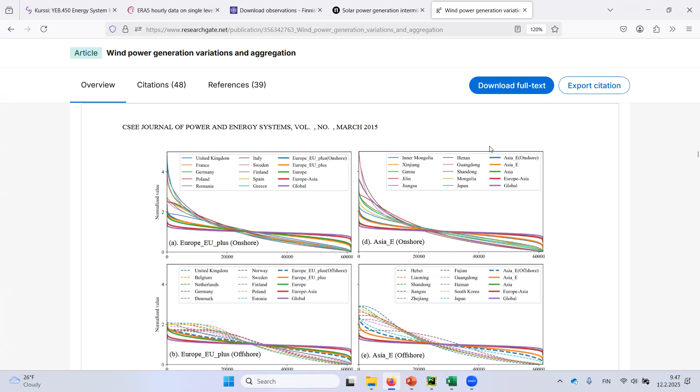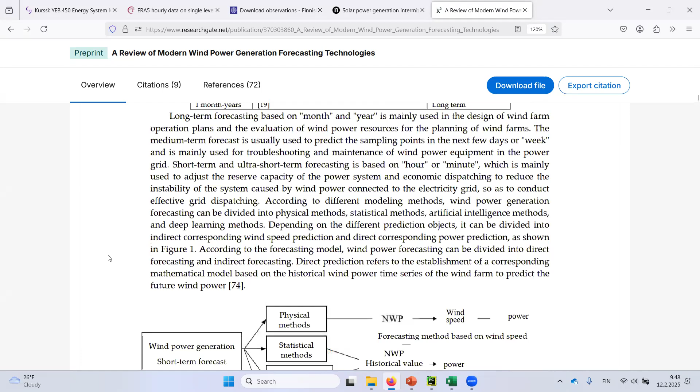And then a review on modern wind power generation forecasting technologies. This was a really interesting article as well. Let's see if it opens up from here. Yeah. So there are a lot of different forecasting methods you can utilize: physical methods, statistical, deep learning, hybrid model methods, so pretty much utilizing neural networks and so forth. This was a really good article in the sense that there are a lot of sources. It's a review article, so it goes through what other researchers have been utilizing. I put these in case you need information related to these; all of these articles are really good reading. And of course, you can utilize AI to go through them.

And tomorrow, most likely, I'm going to take you through utilizing this Copernicus data, since in my opinion it was a bit hard to start using it, but once you got the hang of how to decipher the files with the help of AI, it was really nice that you can visualize the data really well. So there's the wind speed from Tampere for the whole of 2024. You can see during winter time it's a bit higher. If I were to draw an average line, it would go something like this. So during summer, there's a little less wind speed, and that makes a little less wind production.

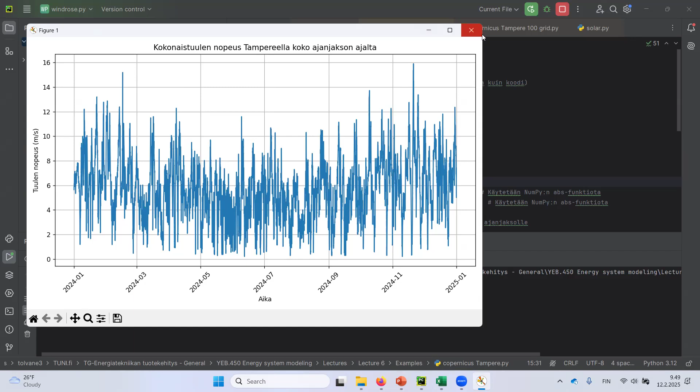And of course, the air density also affects it. And then the maps that you can utilize, so you can make whole areas based on that. This was really nice, that you can make these rather easily. Yeah, so the devil is in the details in these ones. Whether you are making local solar or wind power forecasting or modeling, or nationwide, Copernicus and the Finnish Meteorological Institute provide you real quality data to start making those models.